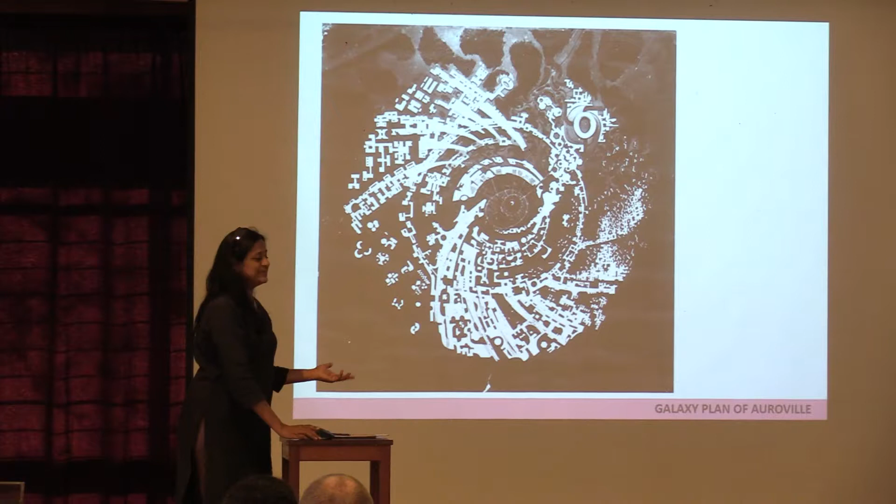So we start from the galaxy, and what we have taken from it is we have interpreted it as a playfield of connectivity - connectivity of built spaces, of landscape, of water features, of movement. This is what we worked out with the tool of playfulness, because we thought that was the way if we get into it - we didn't feel otherwise capable of deciphering it, and we thought if we allow ourselves to experiment, we might come out with some jewels.

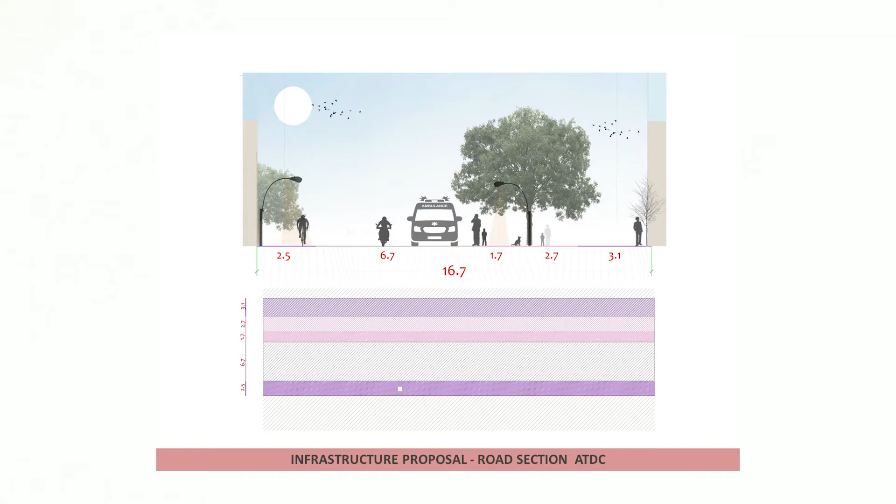I'll begin with the sections that we showed last time. They are of the given road. What we are trying is one of the pearls that came up in Ganesh's presentation - that if you're not seeing the road, it's because it's under the buildings. That means we need to connect from time to time, if not at all the places.

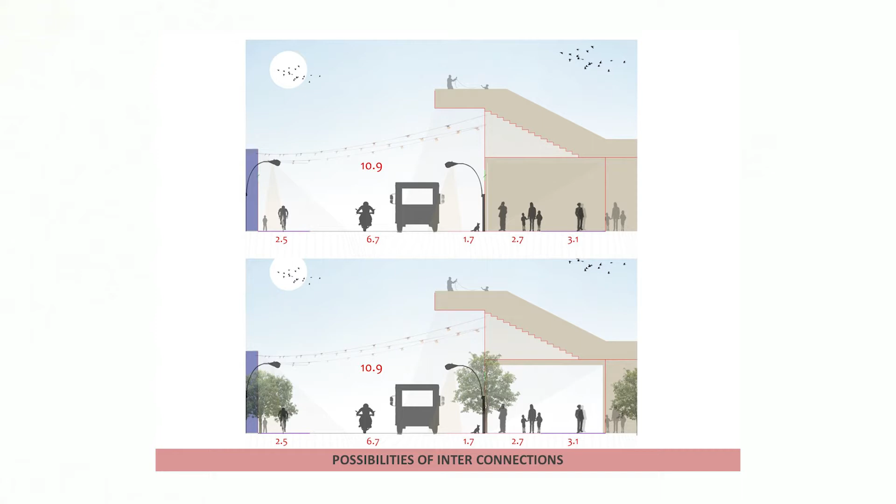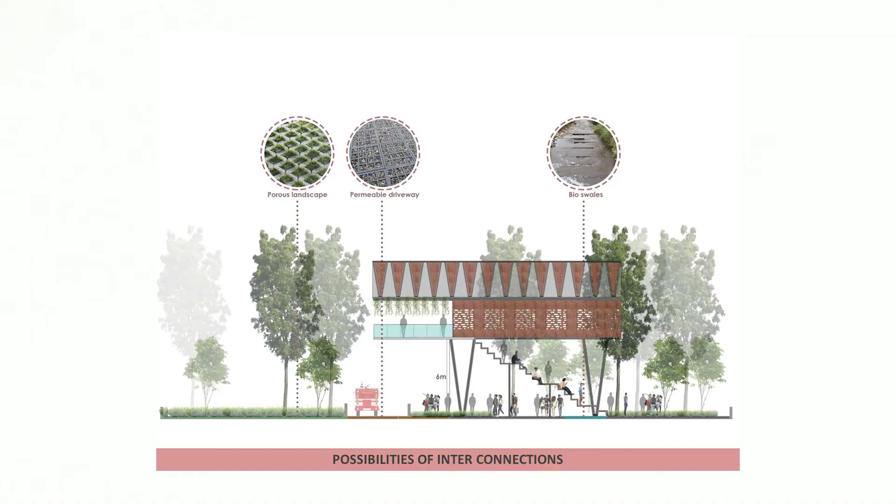So we were thinking of connectivity across the road in the sections, and to tweak the section a bit so that was possible. We've spoken about it last time, and how we feel the site should start from the crown, not beyond the crown on two sides of the road. The moment we stop saying two sides of the road, then we have a possibility of thinking of it as one cohesive whole.

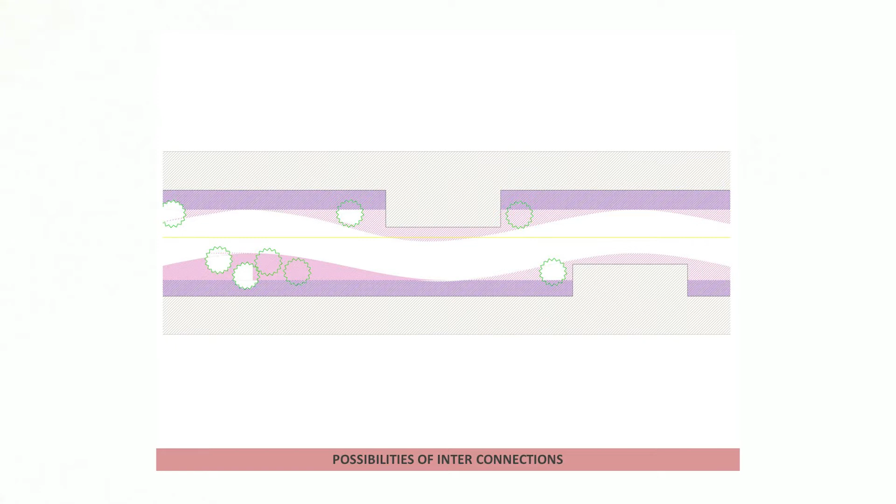And yeah, possibilities of interconnections. Then a question came in our session - Mari said to me that she would not like to go above there because there's so much vibration from the road and the vehicles. And suddenly I realized that is not the kind of road I'm envisioning here. I'm not envisioning fast-going traffic here causing vibration such that we would not like to go over it.

In fact, I was proposing that the library extension happens across the crown. So it triggered us to think - is that really what we are planning, traffic going on this in whatever way given to us? And now, should we even connect? And the question comes: what type of street do we need?

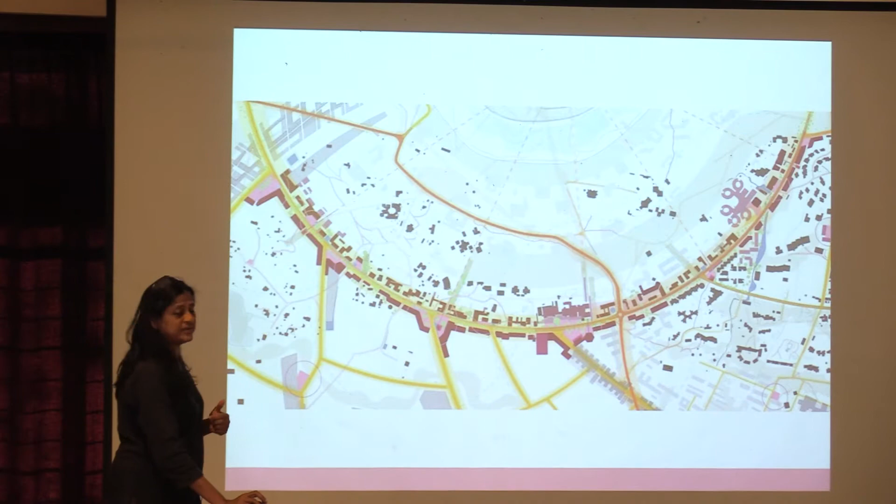Because I've taken this from Henrik - this is Henrik's slide, and he has a 16.7 meter road with built elements around it. As Mari pointed out today, and as we as a team felt, actually it will be like this, because nobody really wants to be right next to a road where vehicles are moving, even if you have 2.7 meters and 3 meters setback. No, we don't want to be around it - we want to be as far from it as possible.

And then what we see of our galaxy plan is a clear cut through it. Is that really what we are thinking of implementing? Because really, even Ganesh mentioned that when we pick it up, it's one whole. Right now already I see two different parts, and the more we go on this line, we'll have more parts. Our team is trying to work on the other direction.

As to how to connect it, so that yes, at parts it's open because we are talking of porosity, and other parts not open. But to have that, what are the examples we find where we have connections on top of the street? So we went back actually.

We went back, thinking what kind of road do we need, and we said we don't need a road. What we need is a street, an interactive space, which is there for mobility, yes, but where the movement is not only of vehicles and people, but of built elements here and there, and people do want to connect and go through, because the Galaxy plan is all about communication and integration, and it should be seen in all the elements and at different scales.

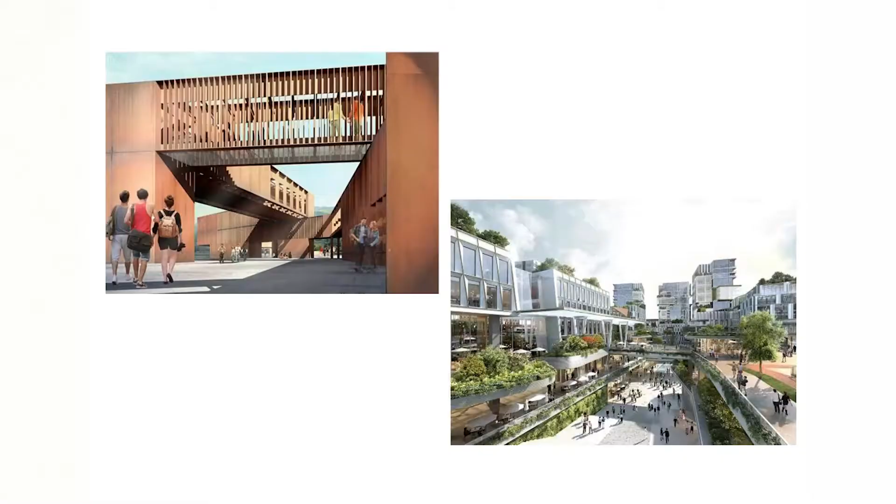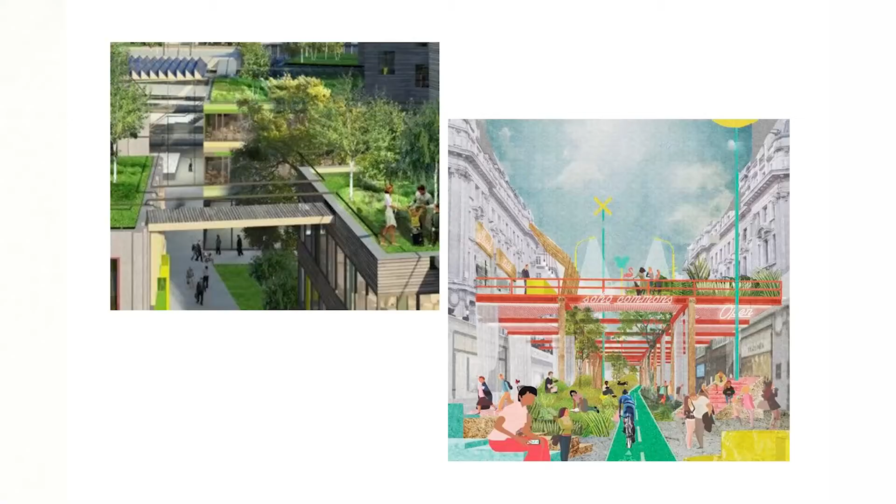Then we looked at some modern examples, and we saw that wherever there are connections, we see what kind of climate is on the street - it's not fast-moving traffic, not buzzing by, only then we feel like connecting through. So if we really think of connecting, we need to think of what we are proposing as a street. Some more examples - I like that graphic because it really brings it down to the scale of what we may have, and then we feel like connecting it over.

It is related, and from that starting point we start again our presentation and say that Crown for us is a place where we see our culture unfolding. As every city and every place has a culture, we believe that Auroville has a culture of values, which we have either imbibed or are trying to imbibe.

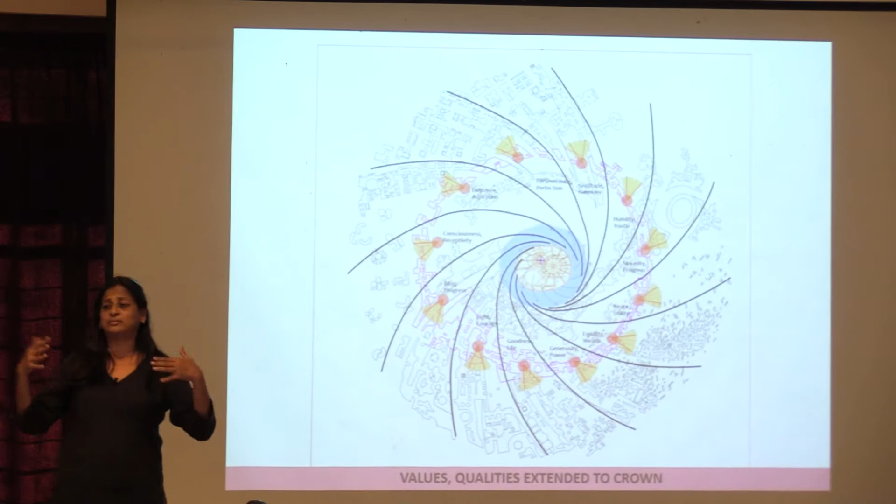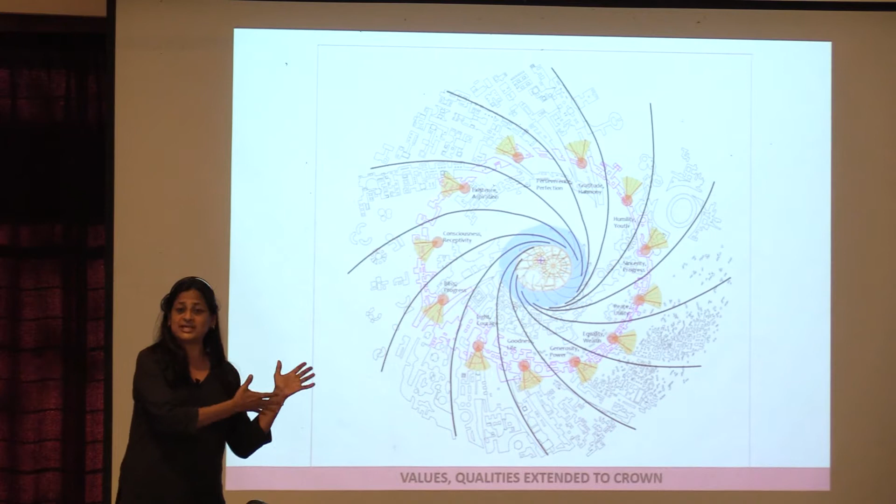Our street, like the downtown Auroville, will not have commercial like the cities have, because commercial is what their value is. Our values are different, and those values will be out here to see, experience, and live on this street, and they will be in the form of art.

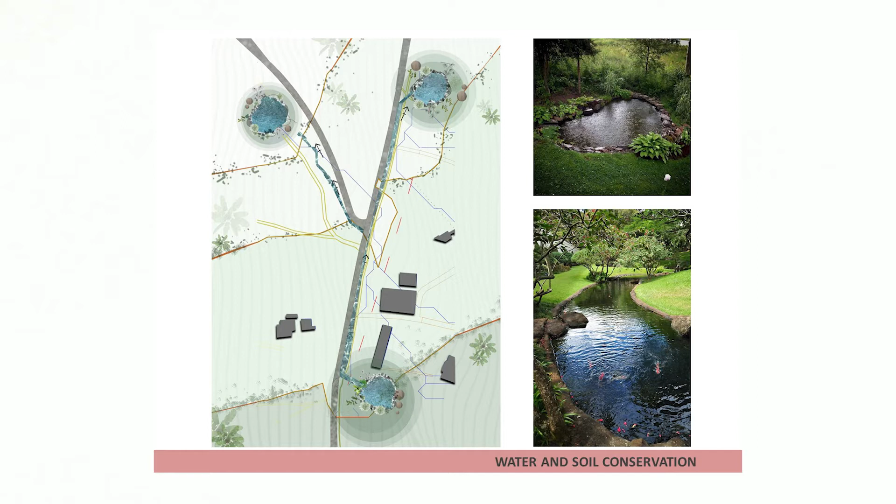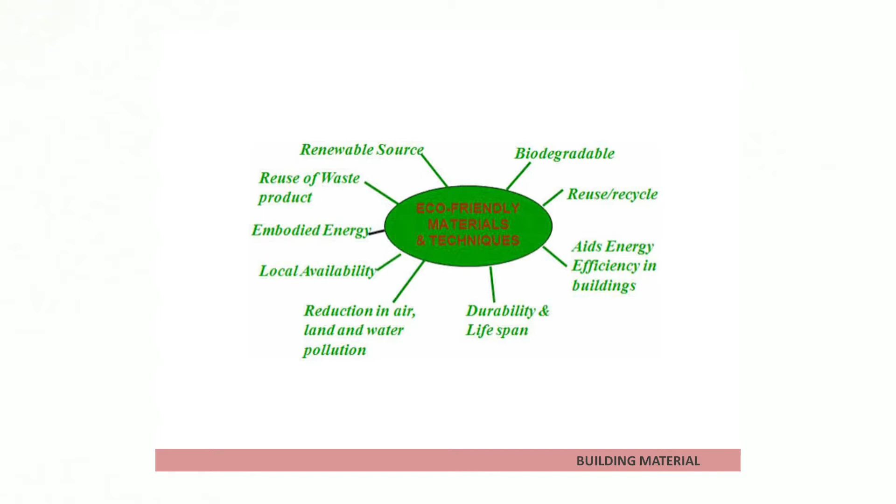We need outdoor spaces for these, it's inside. They'll also be in the form of water and soil conservation, because that is part of our value system, and the different building materials we have been exploring ever since Roger, Poppo, Piero and Helmut started building. With that background, I come back to the proposal we have further worked on.

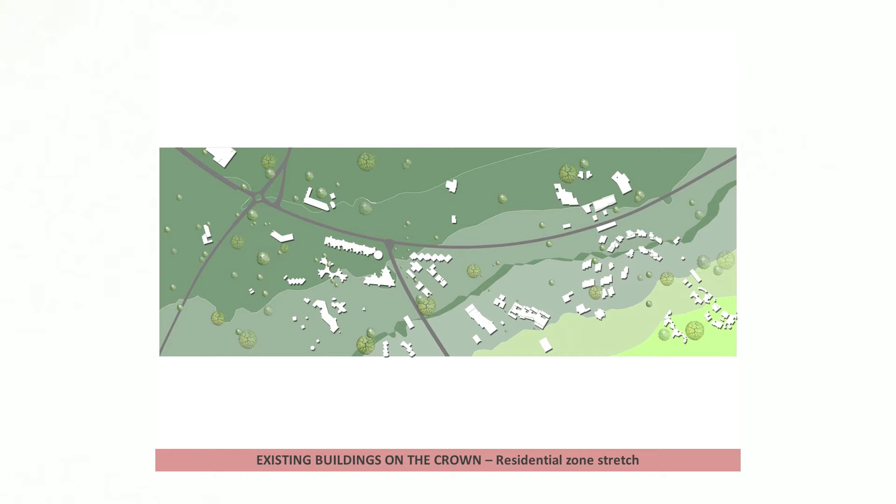These are the existing buildings in the residential zone from Solar Kitchen up to Sante and a little beyond up to the park. What we have here now is a slightly different version.

What we had tried before was to take the footprint of the galaxy, and now what we have done is interpret that into different scaled spaces interconnected. Along with the existing, we have kept the proposed spaces.

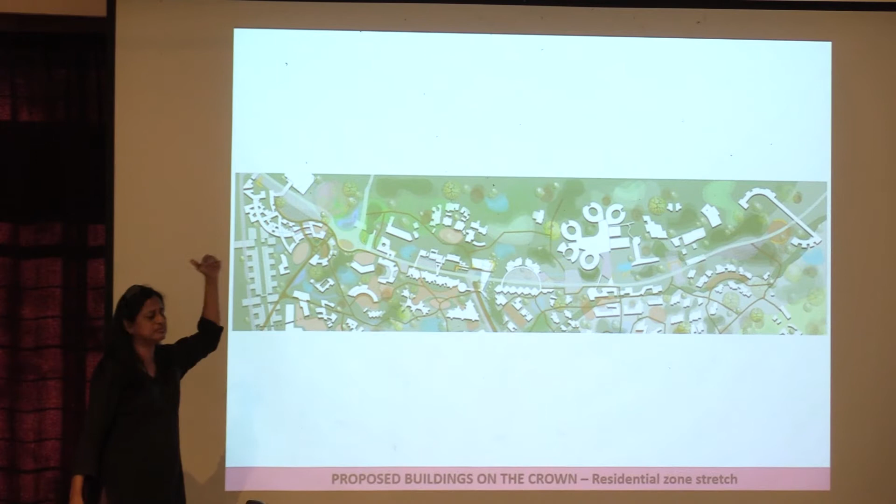Manu has talked about different possibilities of having bazaars, so we have different bazaars here.

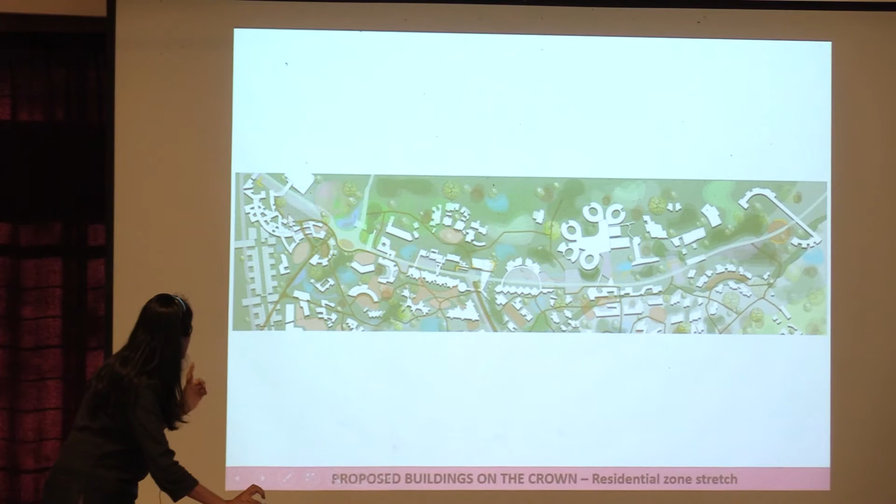So the space around the street is kind of punctuated, making it wider at places, narrower at places, by activities which will be used by us. At the same time, as mentioned twice already, if an ambulance indeed has to go by, the other vehicles are able to be on the side and the ambulance can go by.

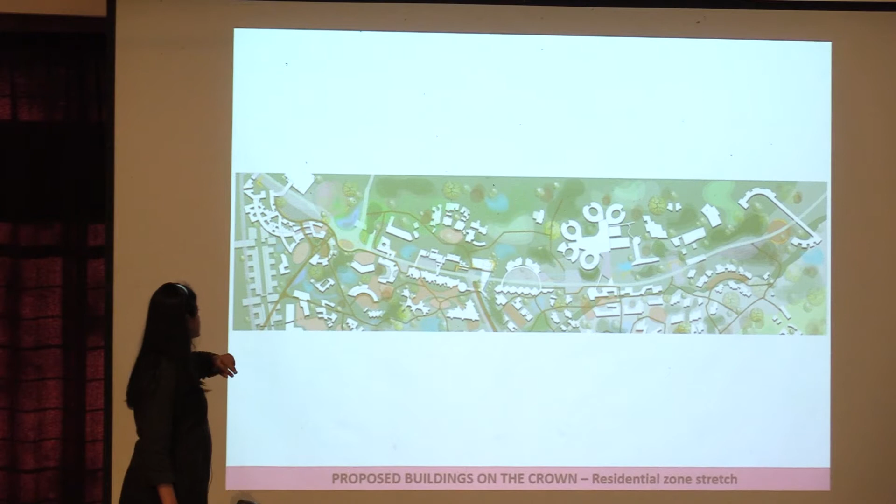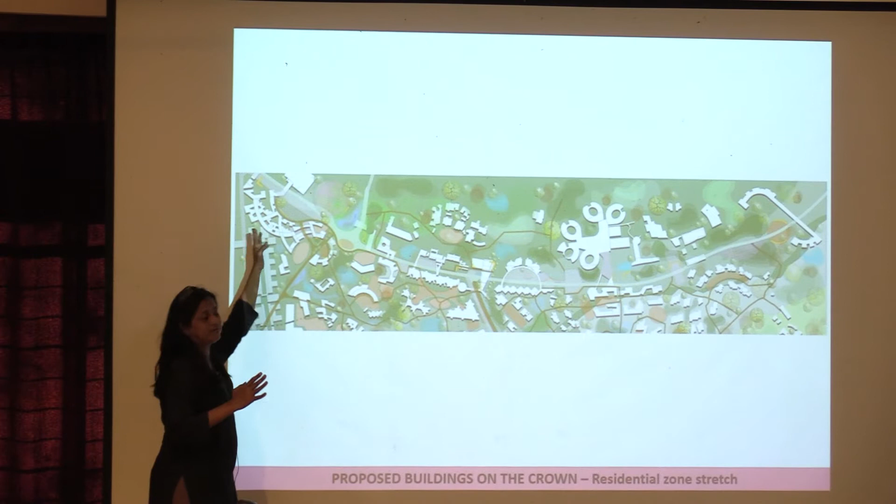What we have here is the input from the residents last time. I had said that when we connect built spaces to each other, let us also have a common function, and I was told why not have a parking for Solar Kitchen, because people come, they park, and it's required, and it's so ugly.

So this is of course not a design, but a kind of urban design where we say that we can have connective space.

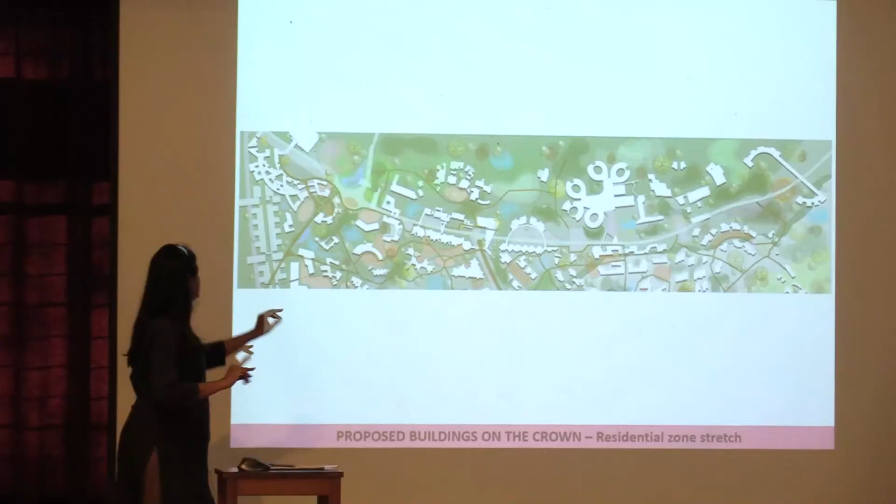I was also told by one of the youth that yes, we want to be out there, but not all the time out in the open, so we want some space away too. So then we reworked the form and feature of the youth space, where it is partially on the road and partially away, with their own inner space.

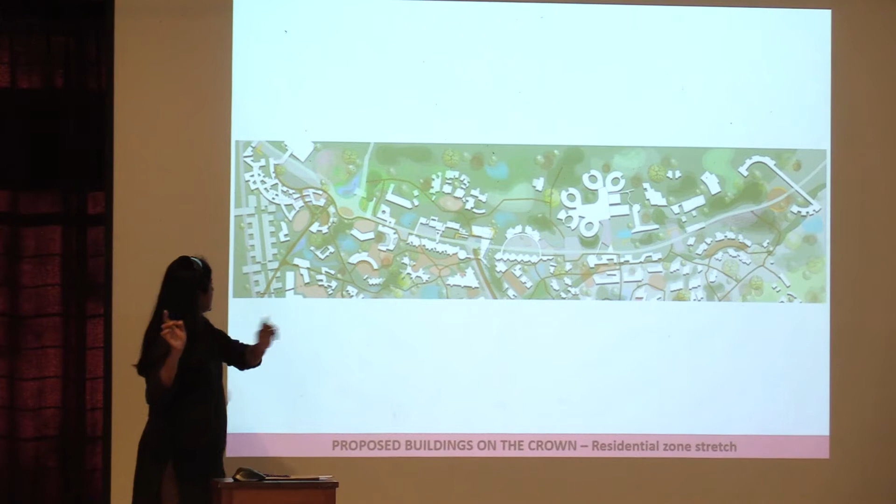Complementing that is another space, more public in nature, and then the road that takes you to the parking. As Mari previously said, most of the parking can happen here, along with other activities that can be thought about. I leave that to everybody to dream about.

Then, because I was talking about connectivity of built forms, of pathways, of people, of the green and of the blue, I said we need to go beyond and see it's not just around the crown that the galaxy will manifest, it will manifest beyond and even on the inner side.

So I have gone ahead with really very basic urban design forms, which are talking about a face which is more public space where people can move about, and secondary public, semi-public facilities can come over, and pathways that go beyond through those.

And they have a face which is more private, and there we talk about water conservation and more private space. The built faces have their own character: one allows the movement of public, while the other side, or the third side, has an expression of silence and privacy, both.

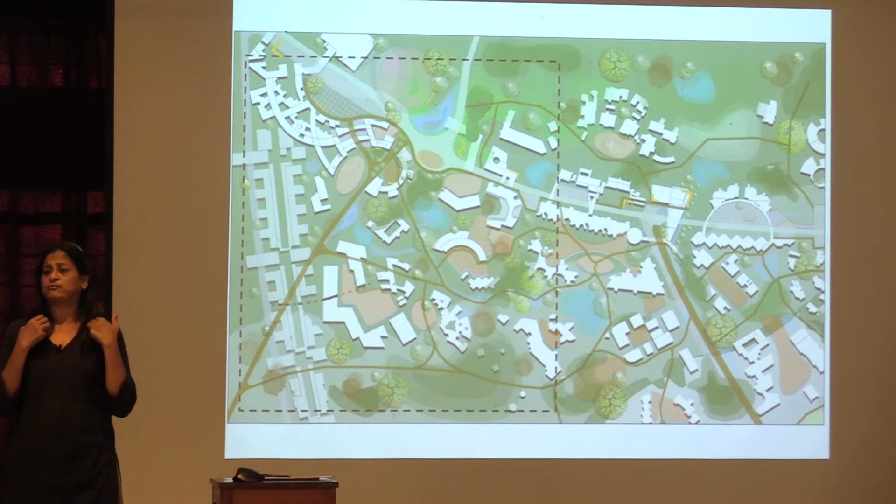So we tried to put these together and make a kind of fabric. This is a fabric of green, blue walkways, and what I'm terming as the red, which is a public space, just to give it a fun color.

So let's have our plotting beyond these, so that the greens, blues, and reds are common spaces, including this cafe. These are kind of spaces we have thought across the library. This is the existing library building.

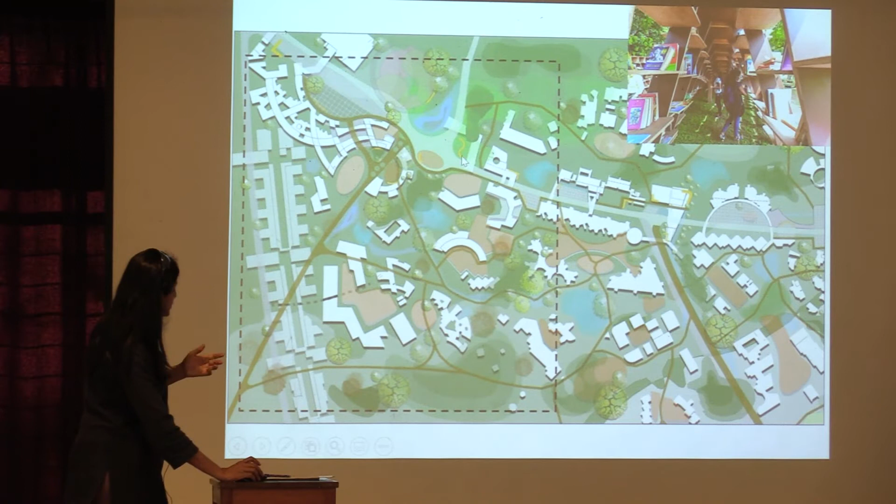This is semi-covered space. On the ground floor we will have book reading and other related activities, more quiet and silent. There are exhibition spaces here, installations, so these are the spaces to read.

These are art, interactive art, and installations, because here in Auroville, when we talk about values of courage, of transparency, of togetherness, we have issues which are burning and which we care about, and we need spaces to put them up, discuss them, and talk around them, because we are here to look at it, be honest about it, humble about it, and find ways to work further on it.

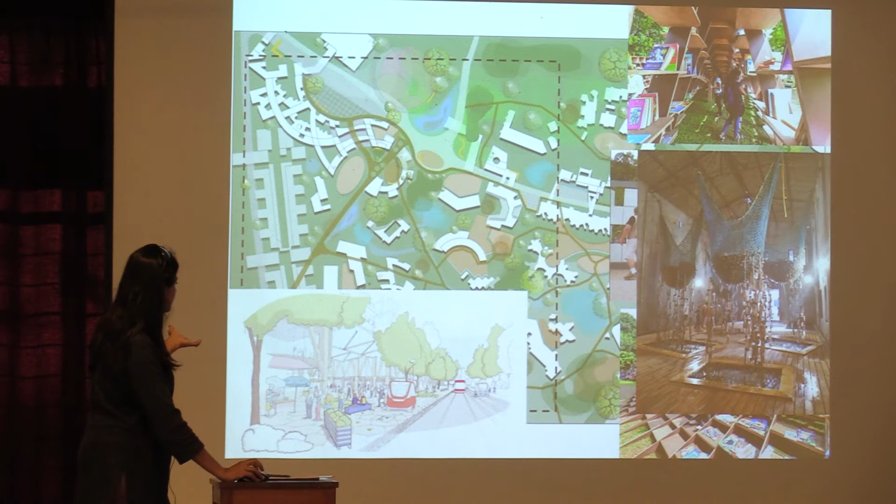And that space is the bazaar that I mentioned, which would be looking different at different times, and more of the art spaces which I've talked about before, ephemeral art.

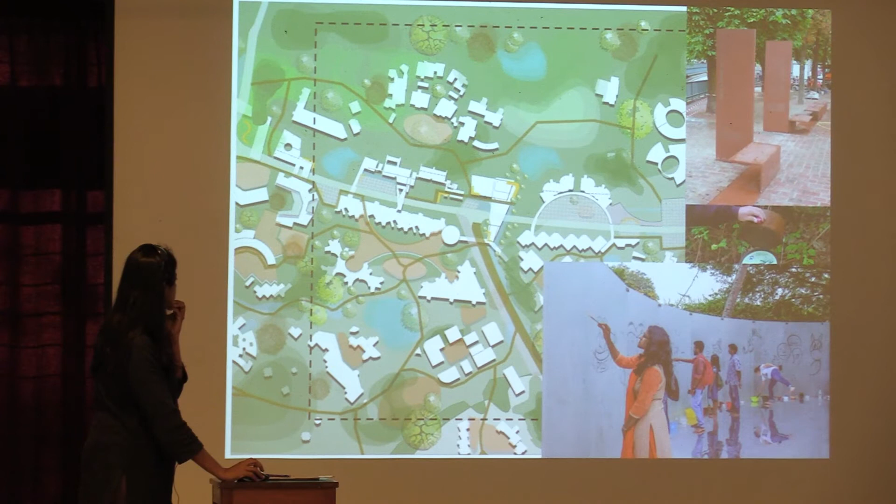One more idea that came up for this cafe over here, that if we have a cafe, the street is below, and this is part of the cafe. It's possible connective spaces can be fun, can be differently thought out.

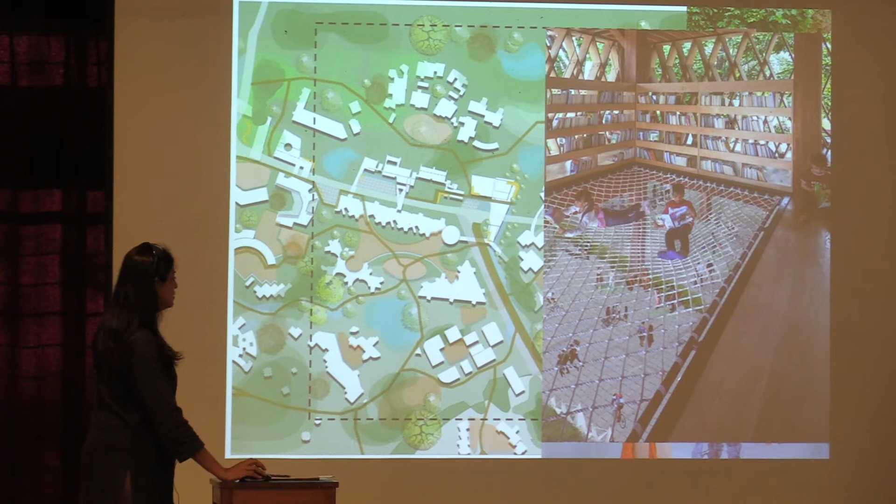And yes, the conservation of water. We had talked about the crown as a bund, meaning we are not just holding water at the crown and flooding it. The water has been conserved, and as per the experts, in different parts, connected through. One of them is crown as a bund, and then of course it's beyond the crown as well.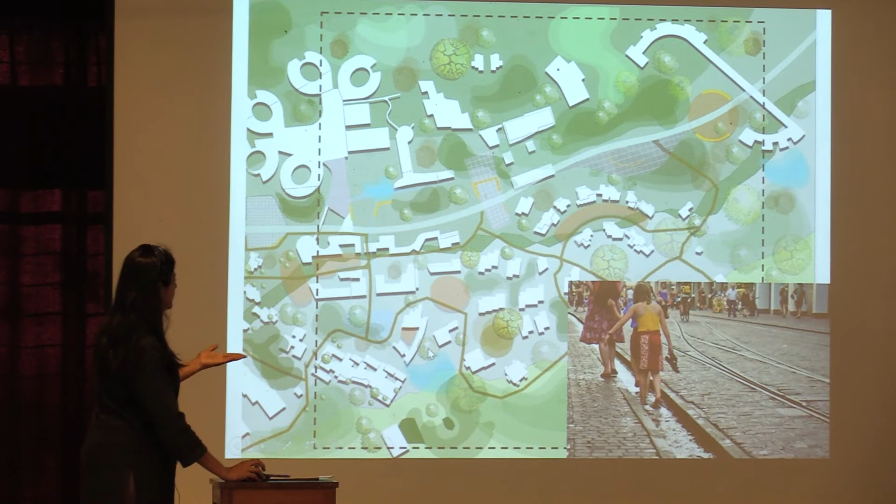And at times it is made possible to feel. And then we were thinking here, so I've changed the footprint to accommodate built spaces which can be more pro-green, talking about water harvesting and so on in the cultural zone, in the green, in the park area.

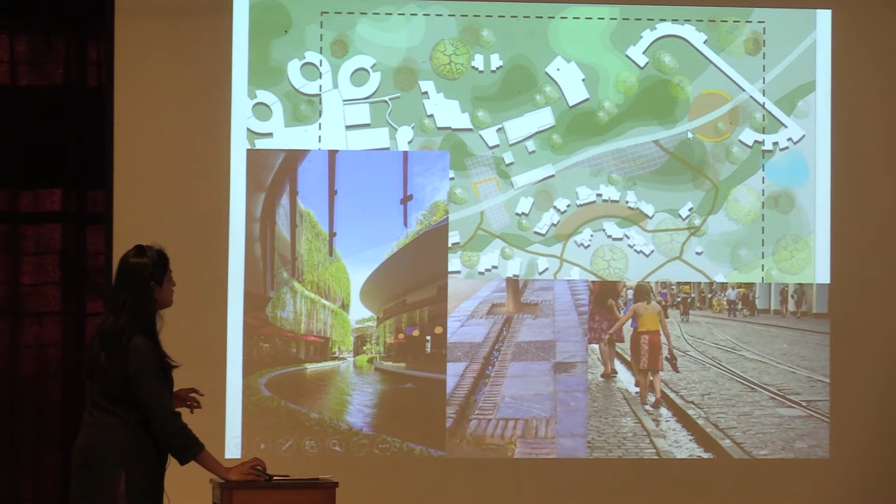This is an unpaved space, and we were thinking we could have a circle of trees and we pass through it, so when we are passing through the park, we have trees around, but there is a part where it's open and the trees are holding us. Let us understand this, that the trees are holding us, literally so, and experience that.

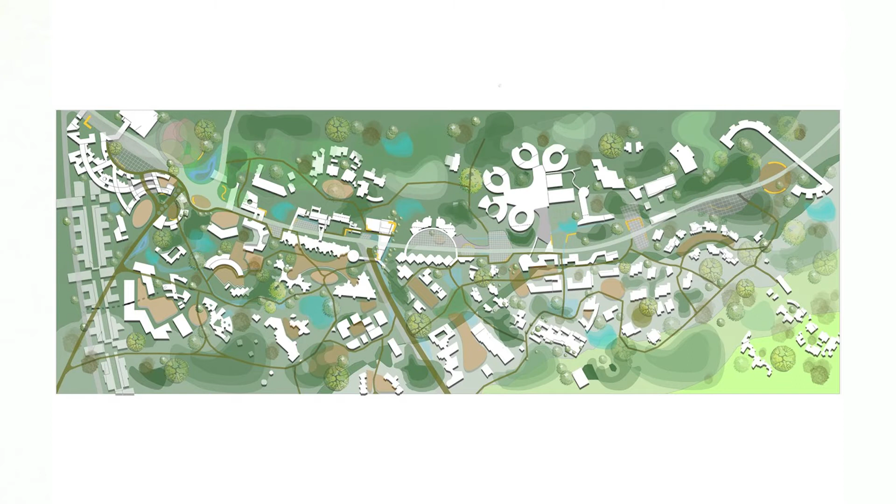This is without the built areas, the green, blue, and the red, and the places for impromptu pani puri, dosas, chais, and also the seating. We could not mark the seating separately, because I was told it's very important to think of seating from different spaces.

And then I was asked by one of the participants, one of the residents, when we are talking of a street which is not following a perfect shape of a curve or straight line, what is the rationale behind this, logically? So one rationale is that we are thinking of movement rather than only mobility.

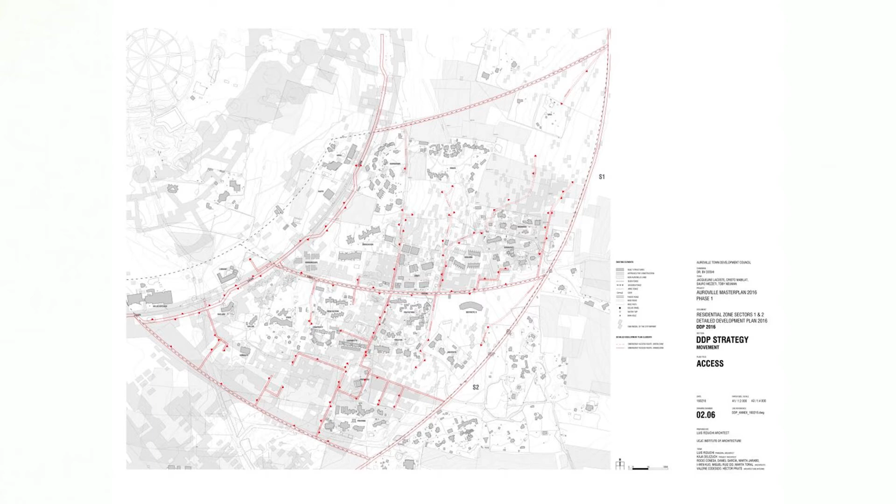This is from DDP Luis Feduchi. It has already been proved that when we have narrower, winding roads, automatically the speed is less. In fact, this is a crown in residential zone sector 1 and 2, and it's not straight, it is what you see.

And then what we did was, because we were stuck with just one area, we said let us really take a fresh sheet of paper and put in our ideas, what we have been trying to say. So we are talking about built spaces which have mixed land use over here. There is a possibility of a tram.

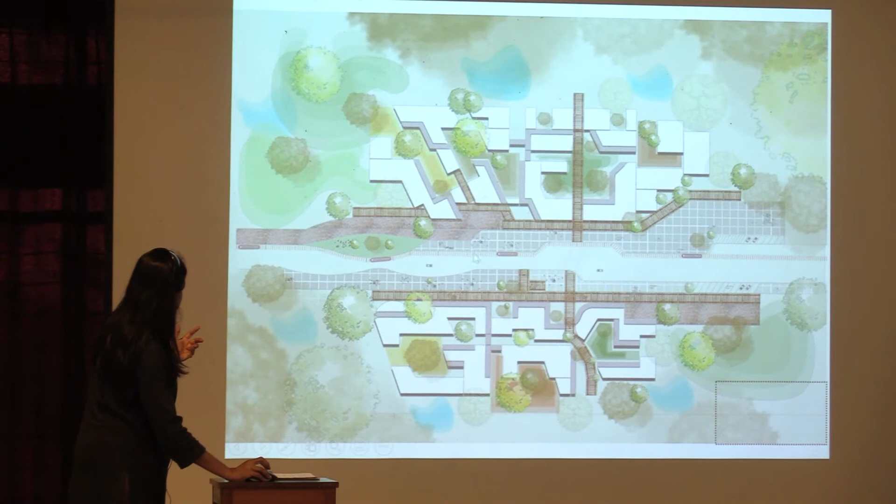And yes, the pedestrians, and it's a shared space, but we have other pedestrian spaces also. There are options—it's not like you have to walk in the middle of the road so that the car becomes slow. No, you can walk wherever you want.

And then there are different types of pedestrian spaces at different levels so as to accommodate different activities. Some areas given away only to green and only to blue, of course, which creates different—the minimum size we have taken here is 6 meters and it increases. We have also some parking spaces, because if we are talking about cafes, there'll be some parking on the sides.

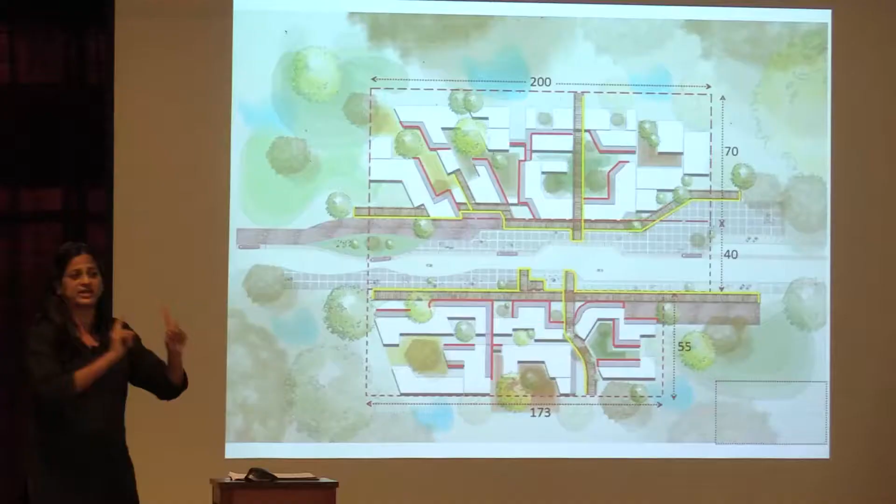And we are talking here about the relationship of the pathways to the built spaces, the areas considered, the dimensions, and the through connections which are shaded connectivity. Also very important, we know about open, semi-covered, covered, semi-covered, open, but we keep forgetting that—it's very important to use semi-covered spaces for internal mobility, walking mobility.

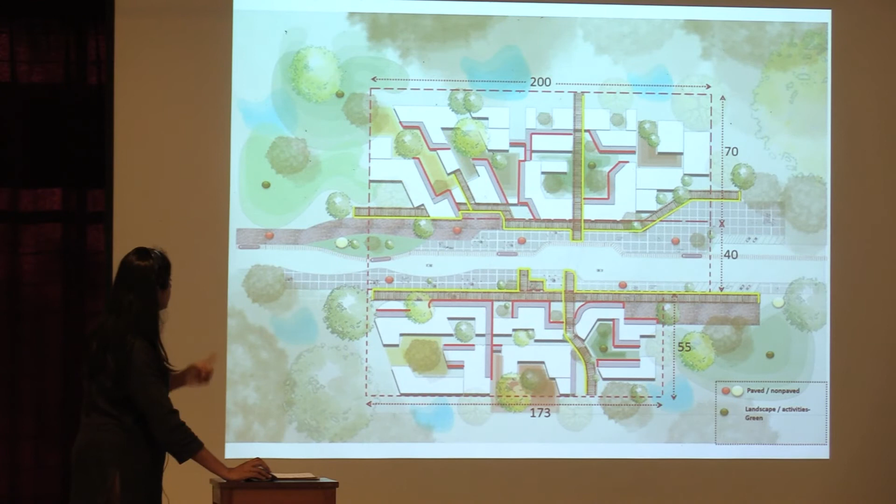And these are just the different types of pavings, and the green and the blue.

What we are saying here is that when we plot our built spaces, we need to have guidelines for porosity. So what kind of porosity are we thinking of? How much percentage of porosity is required so that the through connectivity is facilitated.

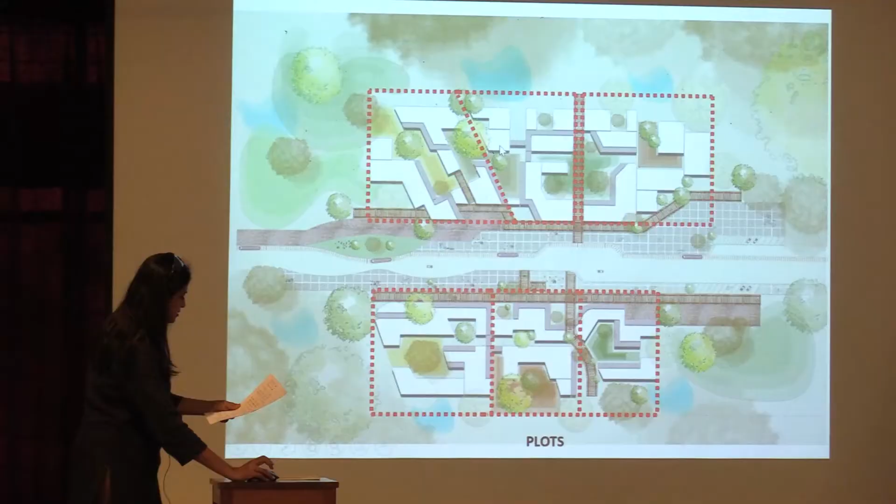The idea of built spaces conversing with the street is facilitated. And then what are the kind of connections that we give, which are built as pathways, which are semi-covered spaces, which are common spaces that two plots will have to put together so that it's a larger common space to be used, so that when working on one plot, we are not working in an isolated way. We are at the same time thinking of the plot next to us, because only then we will be able to work with the envisioned connectivity.

And then the building materials, because if we are having concrete jungles, it's not because concrete is the best element, it's because it is the cheapest and the builder can make the most money. So if we are saying we don't want to do concrete, we want to try different materials.

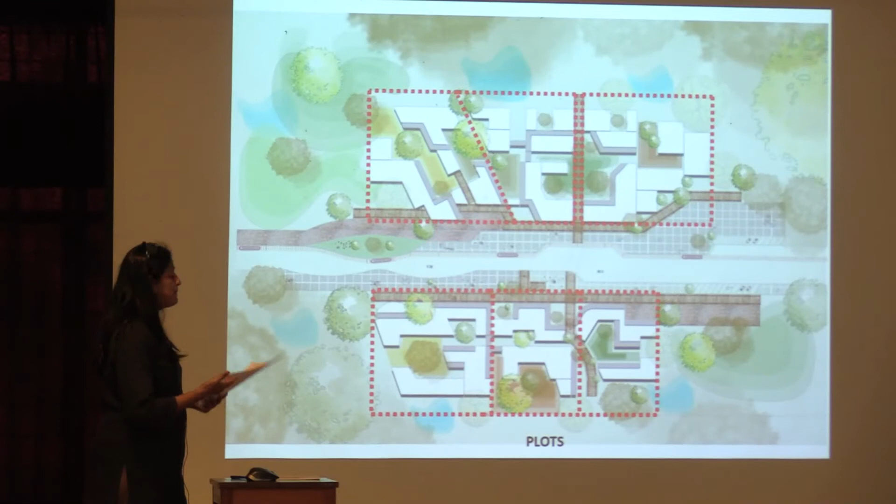If we are saying that we want to have connectivity across, shaded pathways, bridges across, then these require funding, and the funding that we get should be accommodated for these kinds of things, so that conventional buildings will not have a reason to be conventional anymore. Then we will have support for the vision that we hold.

And we have worked out the areas here, because I feel finally it is the plotting that is important, and the urban design features.

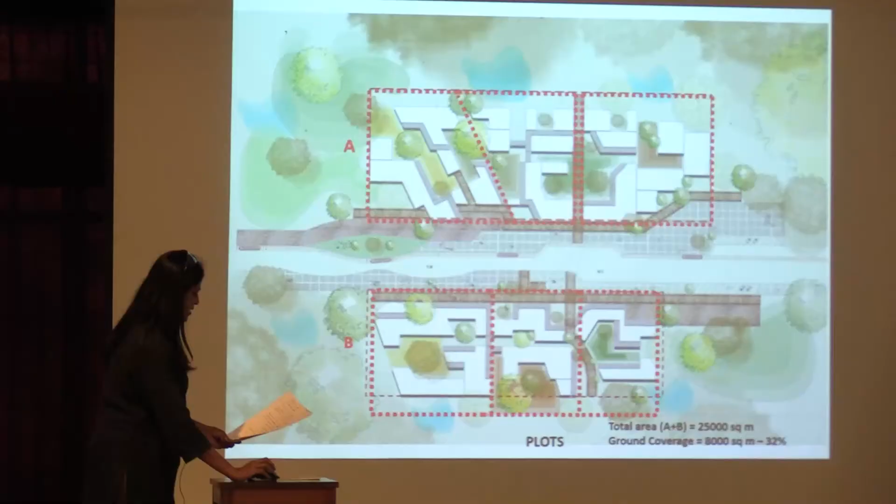And the water and soil conservation guidelines that have to come with every plot as well, of what kind of water conservation, where, how much, and so on and so forth. And yes, space for impromptu activities to unfold, that should not be plotted.

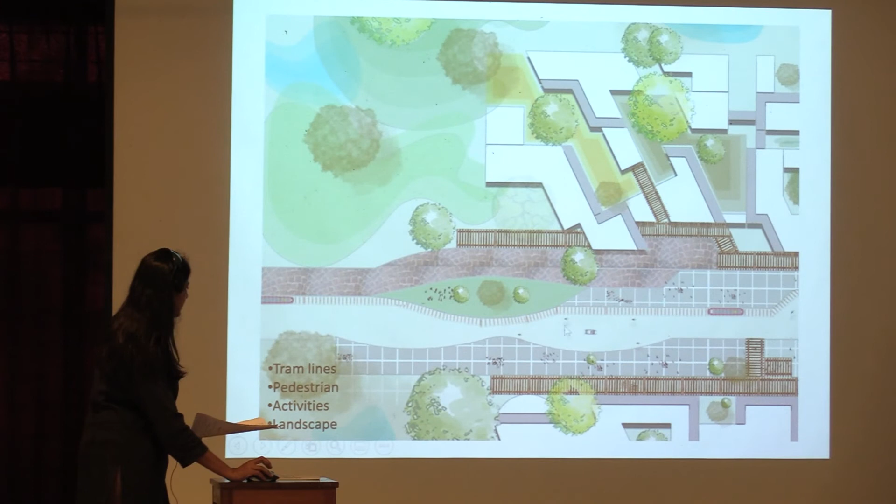A close-up of this. I think sufficiently you can see that there are different types of mobilities possible, and it's a shared space with ample walking around and through. And these are some areas we have worked out, and the population in this given diagram.

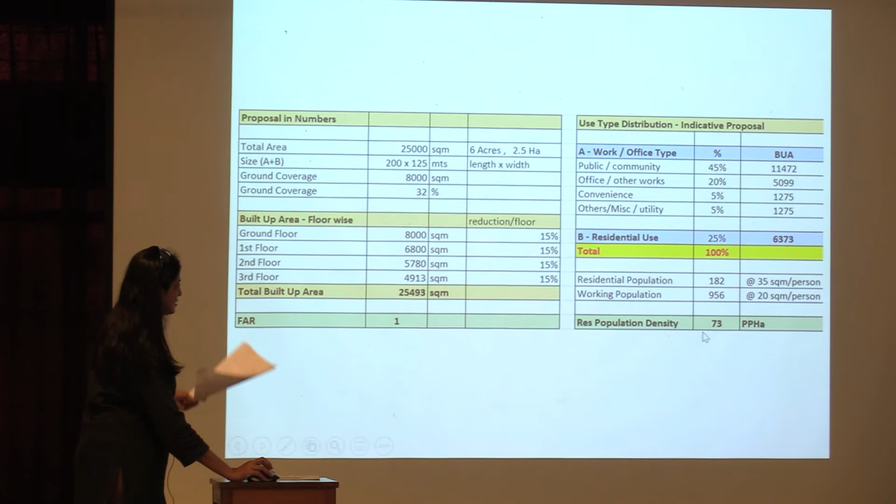And then this is one more option we have done, because not only built spaces need to be connected and given here, there can be different other activities that we envision around, and they also form part of the connected fabric.

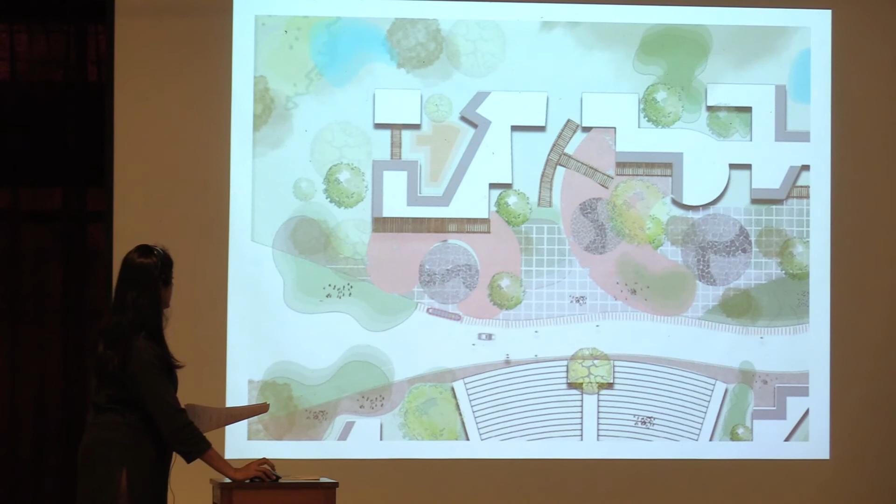Different connectivity through, and close up of the same.

And why so many urban design guidelines? Why? It is because somewhere in being the modern people that we are, we have forgotten that every line has a meaning, which the architects used to know before.

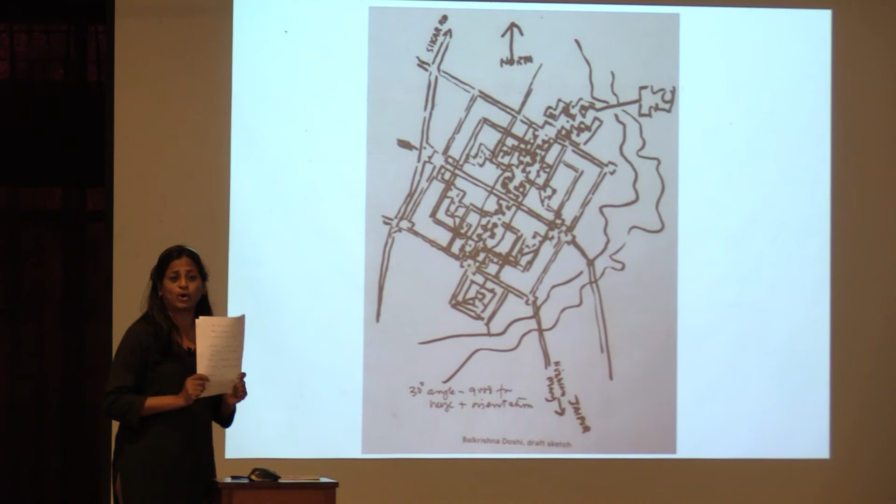And when they drew a line, it had a meaning to it. It had interconnectivity thought of beforehand. It had various layers. Already in one sketch, there would be layers of thought put in. And this is what we need to bring back, and therefore the guidelines.

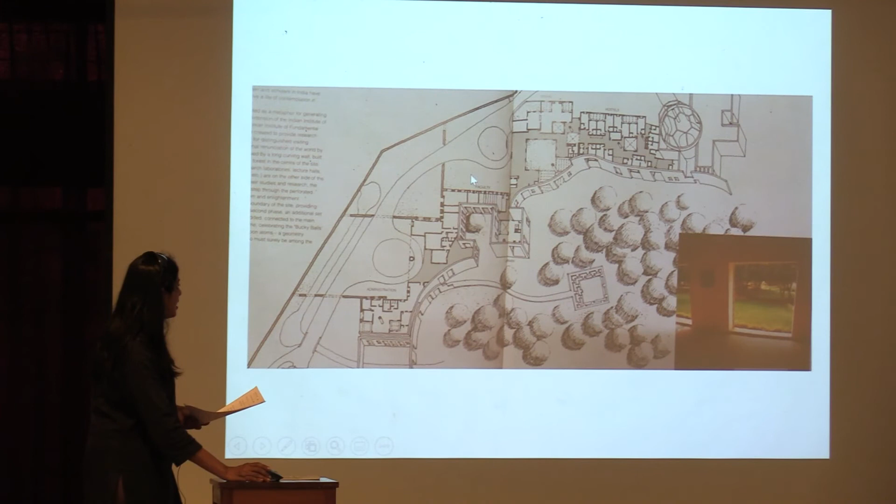And to be really aware that the edges we have hold a meaning in the way they are porous, in the way they are folding into each other or opening out, and the way they fold in gives us different opportunities of spaces and usages.

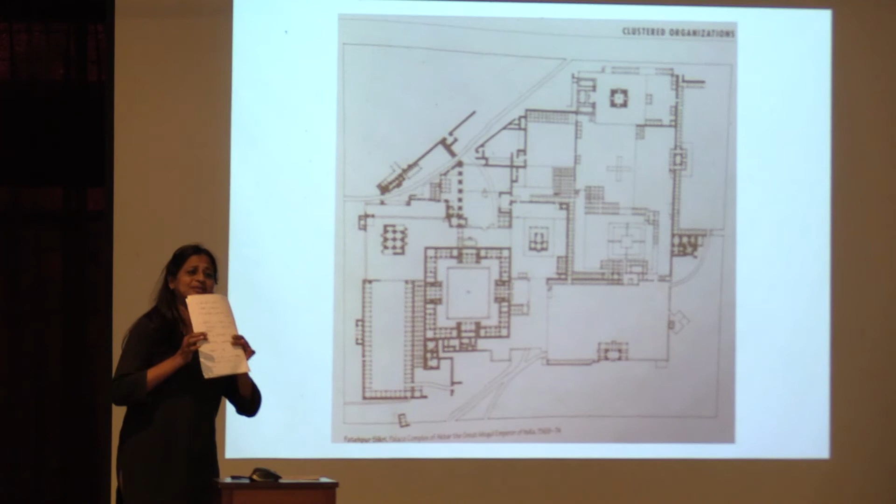And that the hierarchy and scale of the spaces is something that we need to remember even if we are working on a small plot, because it is part of a whole, and we need to have that in our consciousness. And having said that, I come back to the last 2-3 slides, which I was told I should present again today, of having art as a forerunner in our minds when we are designing.

Because if we say we want to make a circle, and even our Vastu Shastra expert has said that whether it's a circle or it's an organic shape, it has actually the same impact in Vastu Shastra.

So what is a circle, and what are the elements that go into making a circle? And can we try out different possibilities and different scales and different lines of the circle so that cohesively it is, or maybe circular in shape if that is what we wish?